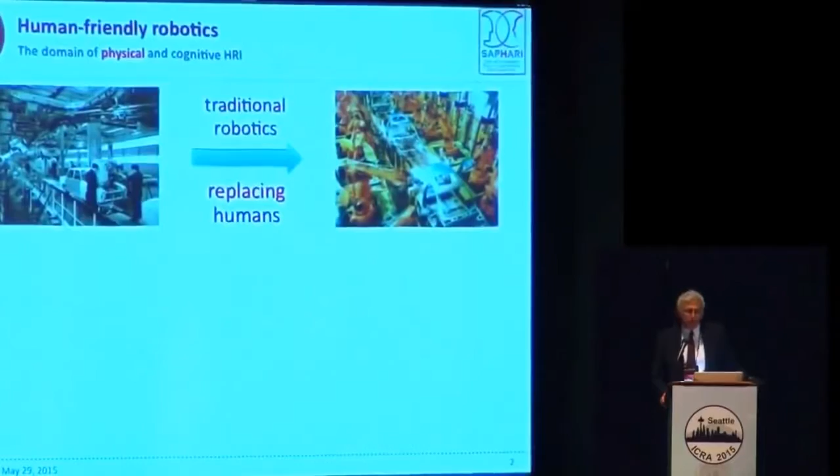I'm very honored to have been asked by the organizer to talk about the research that myself and my group and other colleagues in a European project have been conducting for a few years. So Control Architecture for Human-Robot Collaboration is a title which tries to cover the many aspects that have been developed lately. So let's say the domain of interest is human-friendly robotics. So we want to move away from traditional robotics, which used to replace humans with robots, to the situation where humans and robots will collaborate.

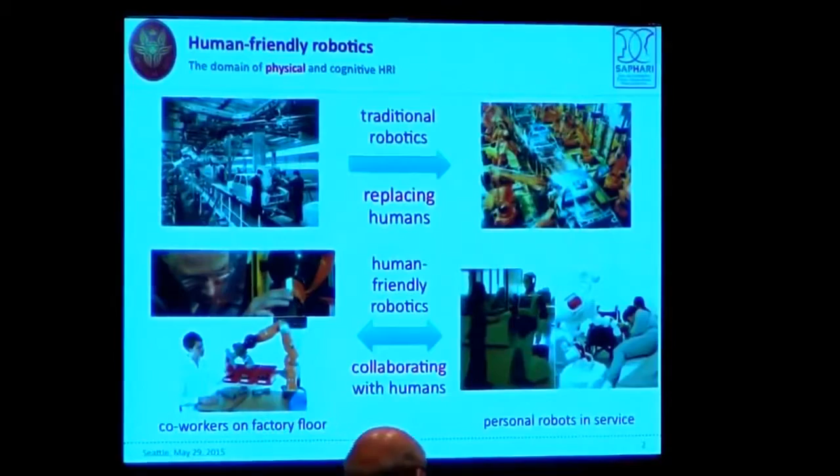And this is going to happen, and it's happening already now, both in industrial settings, so we talk about co-workers, and in homes or in other service robotics applications, both professional and entertainment. So this is the context, and in particular, we are interested in the physical aspect of this human-robot interaction. Of course, the cognitive aspect is as important, maybe even more, but without the physical aspect, you will see that you don't go farther. So my background is in robot control, so I present here a few control problems which are safety-related and which are important in human-robot interaction.

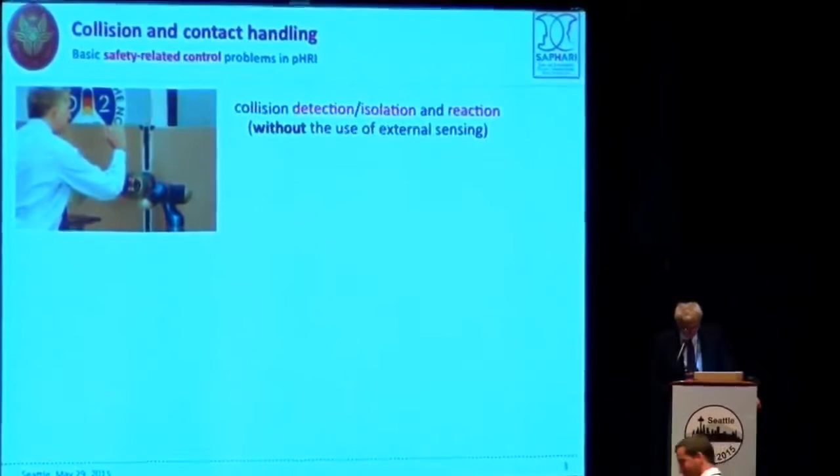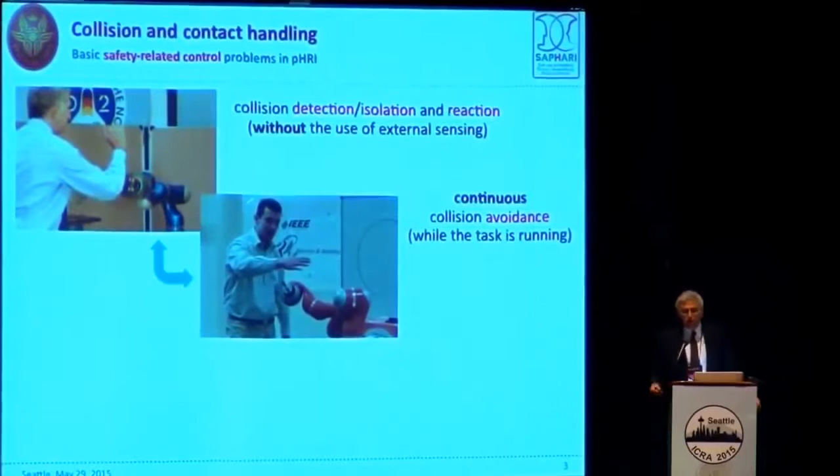In particular, the handling of contact, which may be harmful, so they become collisions, and how do you detect collisions, how you isolate these collisions, and what the robot should do in reaction to that. And possibly I will present some solutions that do not require any external sensing. They just can be implemented based on the robot's own proprioceptive sensing. Of course, this is kind of the last event when a collision occurs, so you would like to have collision avoidance continuously, permanently, whatever the robot is doing, and this will allow the task to run despite the fact that the human entered the workspace.

There is another situation which is relevant, namely when this collision becomes intentional contact because human and robot would like to collaborate. So instead of escaping possible contact, the robot should look for contact with the human, understanding which parts should go into contact and how you handle this interaction at the physical level.

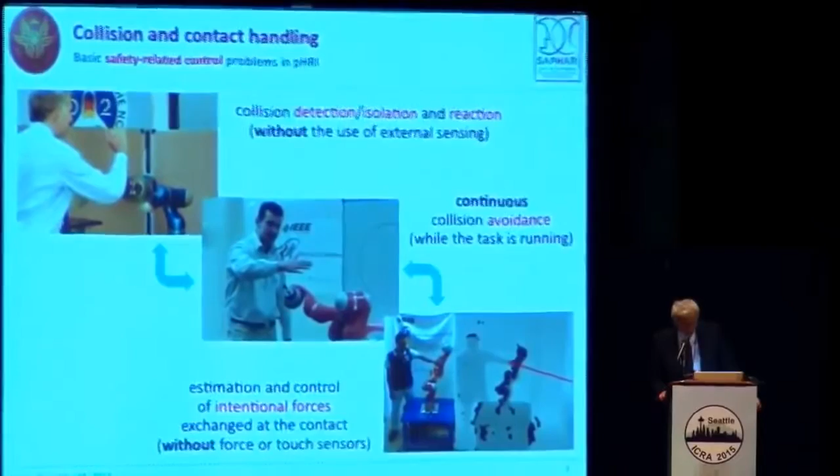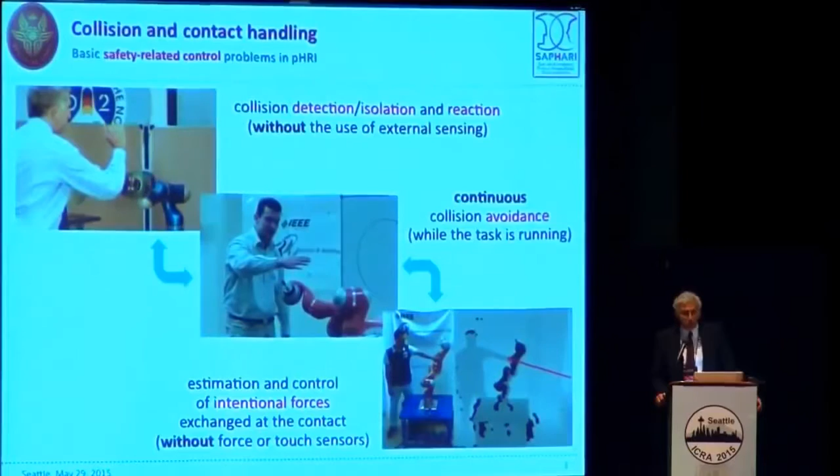And possibly, since this contact may occur at any place along the structure of the robot, like in whole-arm manipulation, then you would like to rely not on specific sensors like tactile sensors or proximity sensors or force-torque sensors, if possible. So in this respect, these basic problems correspond to three layers of the control architecture that we have been developing over the last 3-4 years.

The lowest layer is safety. Safety in the sense of physical contact, so detecting collision and reacting to collision. Of course, this includes also mechanical redesign of the robot, which should be compliant, possibly at the joints, maybe with soft coverage, lightweight links, and all this mechanical part. From the control point of view, you build upon this mechanical and electronic advancement to design a safe strategy. And this is the lowest layer of our architecture.

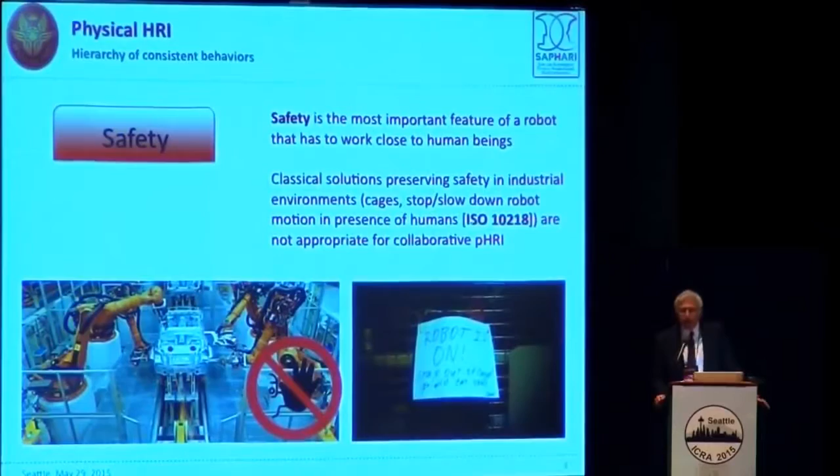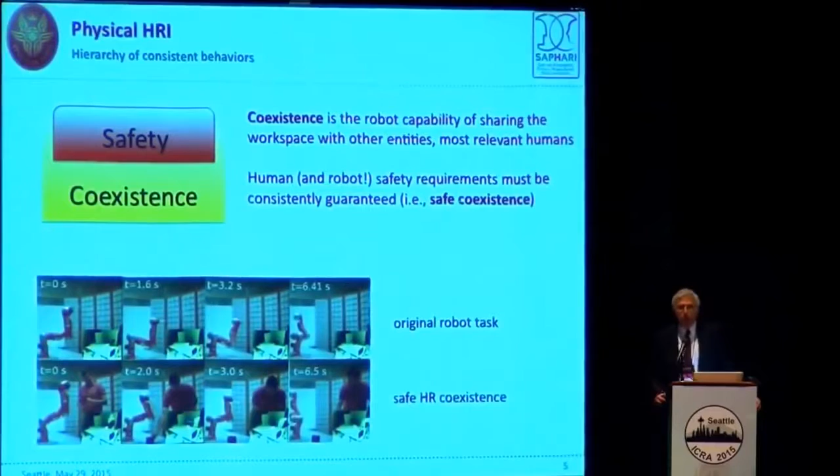Coexistence: we call coexistence the fact that the human and the robot are sharing their workspace. So, of course, this is the most interesting part right now, but you don't have to forget about safety, because a coexistence without safety makes no sense. So safety is always present. On top of that, like in a subsumption architecture, you have these coexistence capabilities that you have to guarantee.

Finally, collaboration. So this is the highest level of this hierarchical control structure. You can collaborate in several ways. Of course, we are interested in the collaboration which is physical, not contactless. Of course, you can exchange information with the robot by voice, by gesture, and so on, but even by pushing the robot in selected places to let it change operation or task.

And again, collaboration is important, but collaboration should coexist with the fact that other parts of the robot do not collide with the human, except for the selected arm or hand or whatever part of the human body. And if everything fails, the safety layer is also always there. So in this sense, I will present some solutions for each of these layers and some examples through videos that show how they coordinate and what they represent in terms of robot behavior.

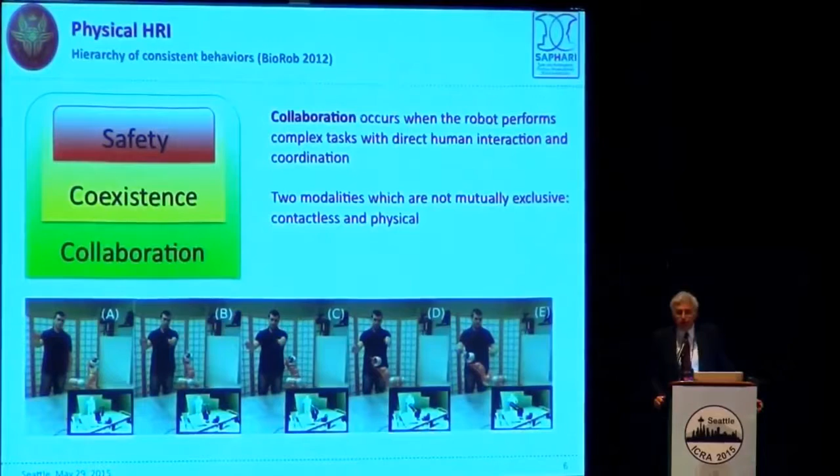So suppose that we want to do collision handling. We start with planning a motion to prevent, of course, this collision. Then we execute the motion and we use our feedback to control and avoid collisions online in real time. But if something fails, if the human is too fast for the robot or some unexpected motion occurs, you may collide, and so you want to detect the collision. And you have to distinguish if this is intentional or not. And if needed, you have to react or replan. So the following slide concerns this aspect.

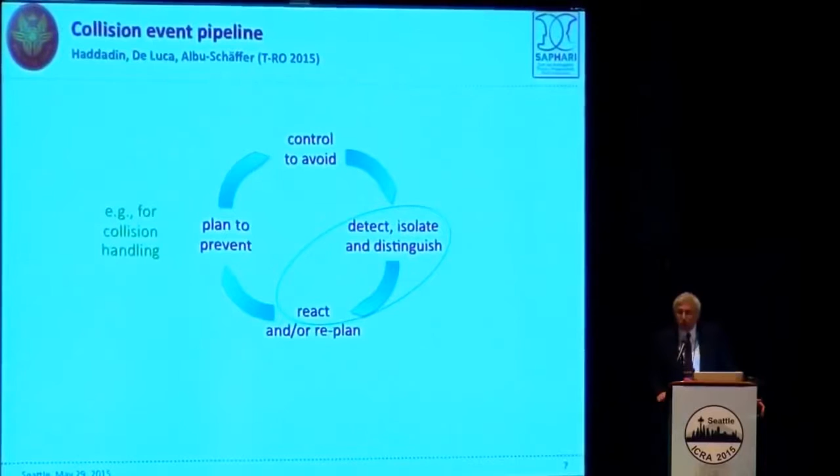For the collision event, we developed after a few years a pipeline which goes from detecting a collision, so saying yes or no, there is a collision or contact; isolating a collision, which means locating the link where the collision has occurred and possibly also the position of this contact point. Identification means reconstructing the joint torque caused by this collision, and eventually also the Cartesian force at this contact. This terminology comes from the literature on fault diagnosis: fault detection, isolation, identification. In fact, our solution sees a collision like a fault occurring to our system.

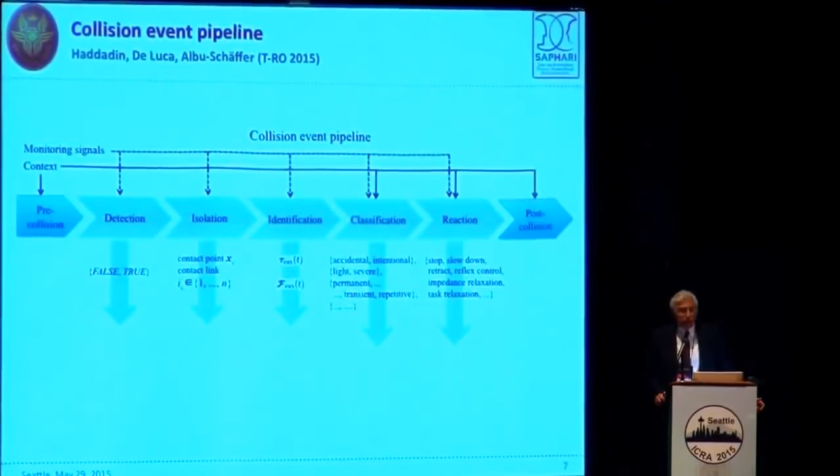And then you can also classify which type of contact it has been: accidental, intentional, or severe. Of course, this metrology of collision is very important. And finally, react as fast as possible and in the most intelligent way. The simplest reaction you can think of is to stop the robot. And in fact, in